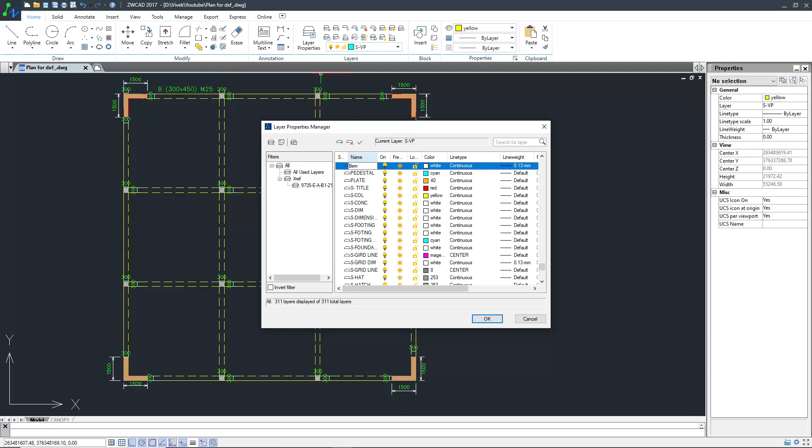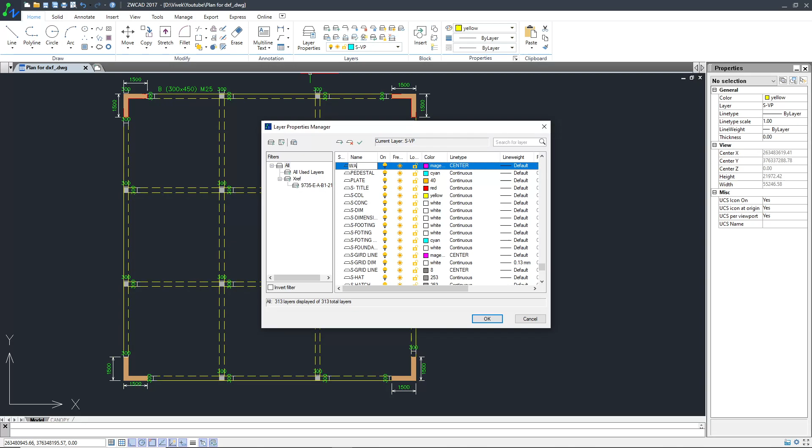First of all, let's make one for beam. We can change color also. Beam, then press OK. Layer properties, then again right click over here, new layer, column, new layer for walls. We can change color like this. OK, press OK.

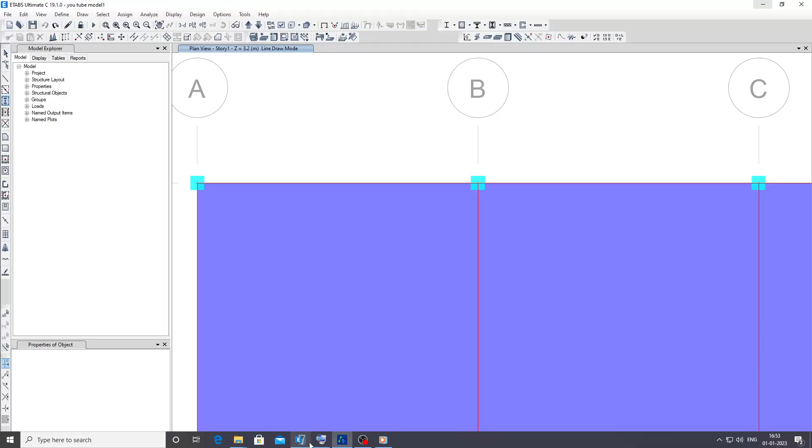Now let's prepare for beams. You just have to take a line and select the layer accordingly, as we have prepared a layer for beams. For beams, we need the central line. As we know in ETABS, the central line is required for beams. The central point for columns is required. But in terms of walls, we need the full length.

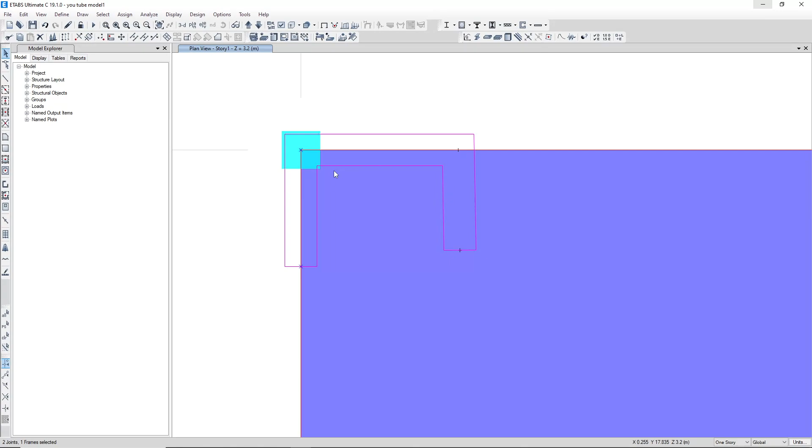If we have to prepare a wall in ETABS, see, we need the full length to draw a line. It means we need a start point and an end point. So in terms of DXF, similarly, we have to prepare in AutoCAD. So we need to take a line, select layer beam for beams. We can select at the central point.

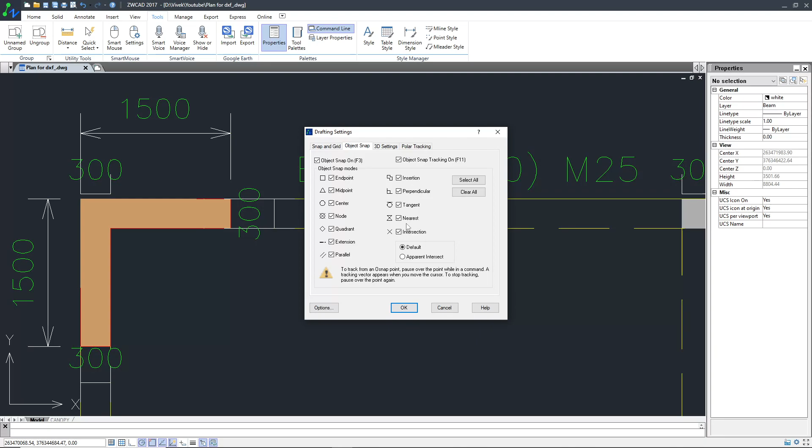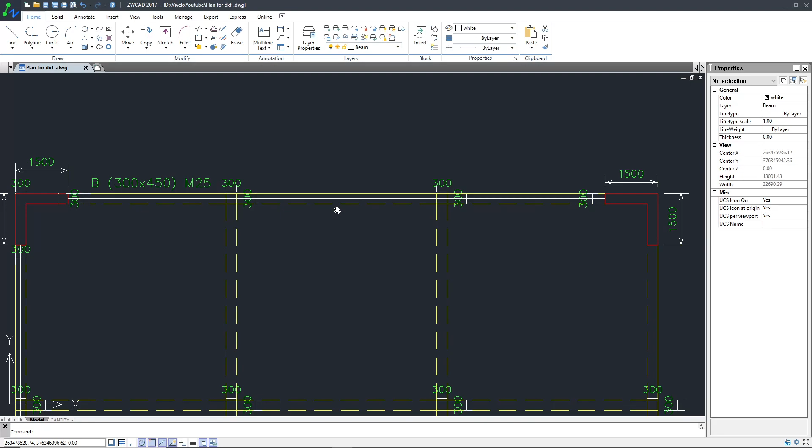Before that, you can turn on Object Snap, select all, OK. Now take a line, central point, beams. Similarly. OK. This is an example for beams. Now similarly, we have to take for columns.

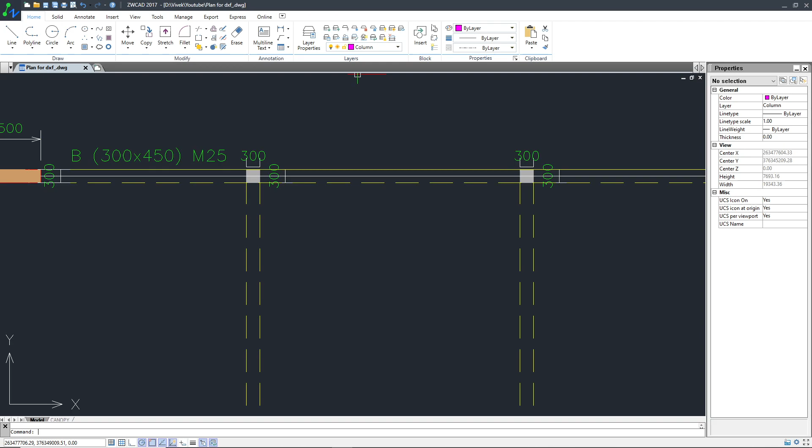For columns, select column layer, by layer for color. This is for color, like the color that we have selected for columns. If we select by layer, then it will come the same. Now, for columns, we need only the central point, so we can draw like this.

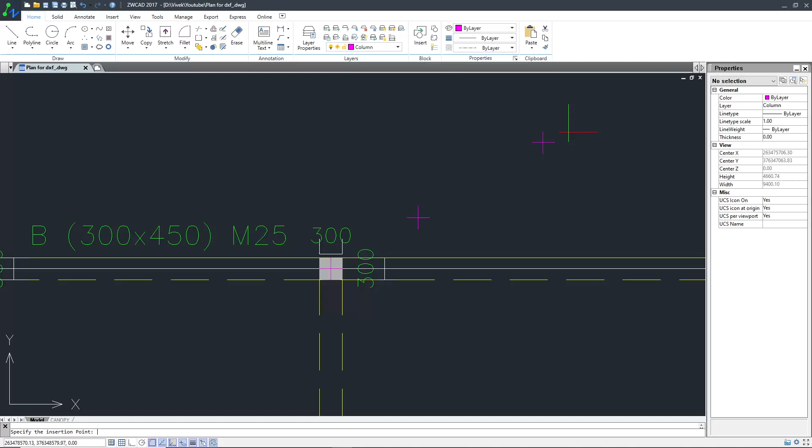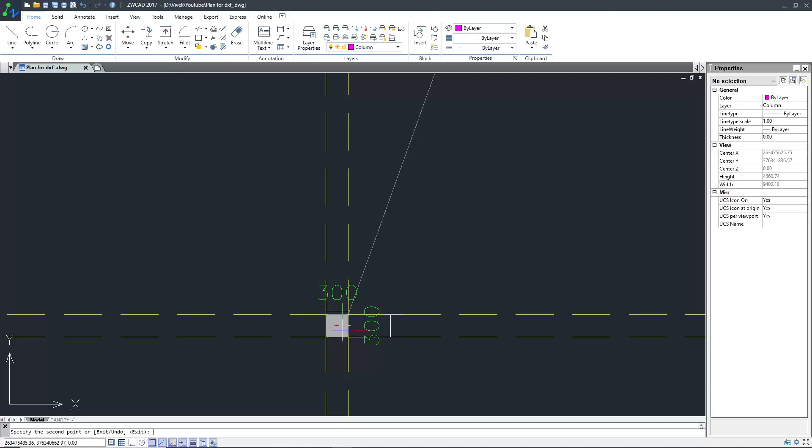For all the similar columns, instead of taking two lines, you can just copy this, take it out, select, right click over here, paste as block. You just need to select this block, press copy, press copy, center point, center point, center point.

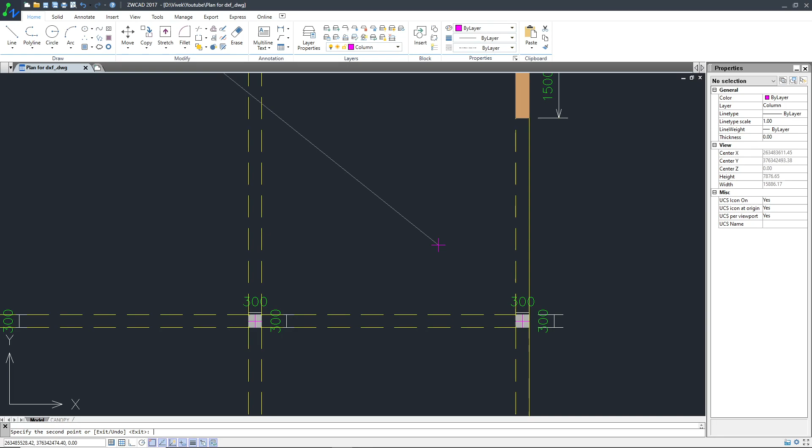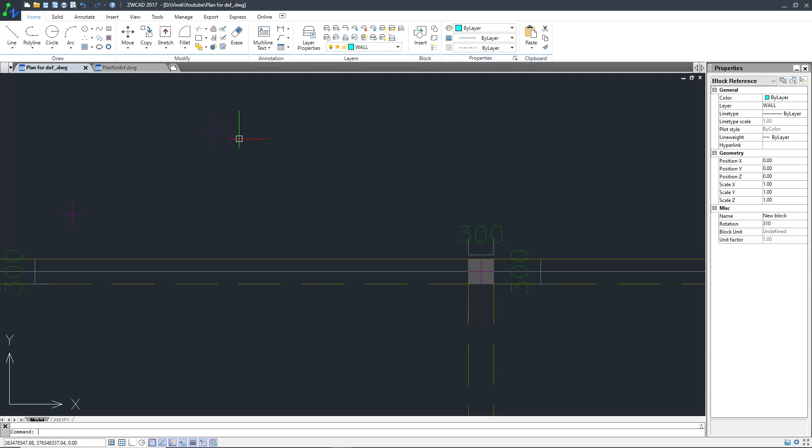Now for columns, we are ready with the points. Now explode these blocks, or you can explode these at the last, but let's explode these right now. For that you have to turn on only the layer that we have used currently. So select these and press X. So this will explode our column layer. Again, LAYUNISO to turn on all the layers.

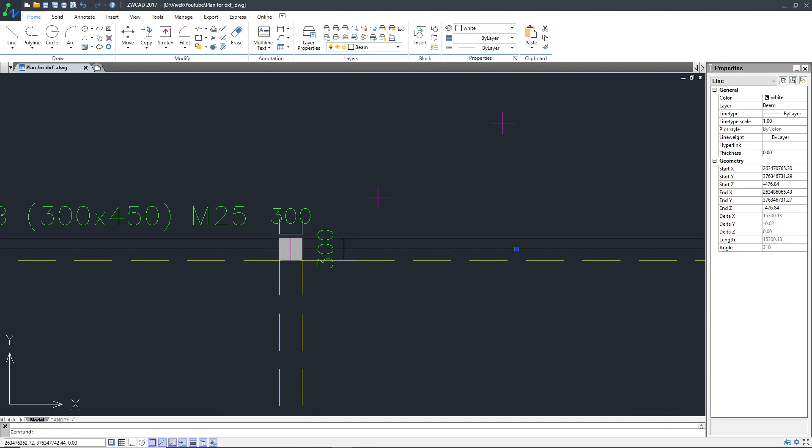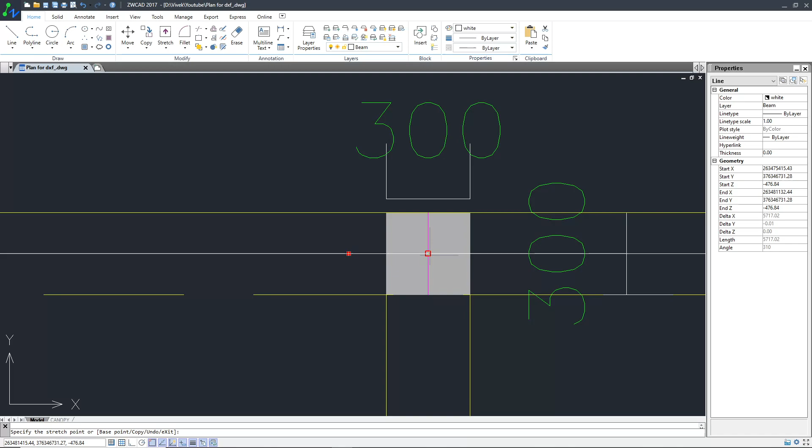Now let's come to beams. Select this line, take a command, break at point. We need to cut this line at this point. One, two, and this three. See, okay. Now we can copy these lines.

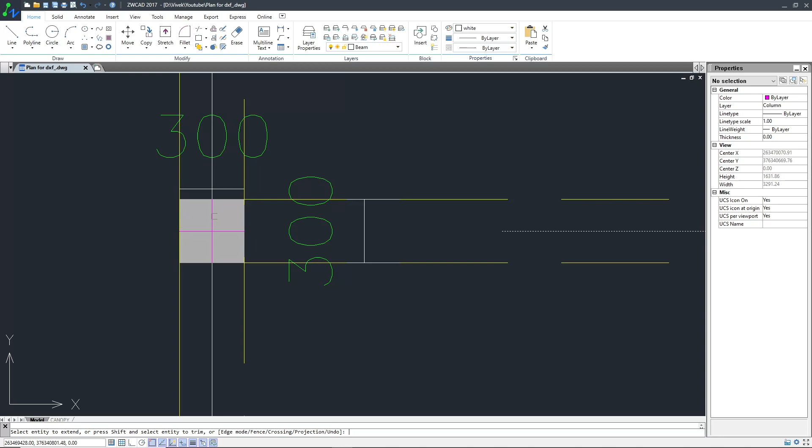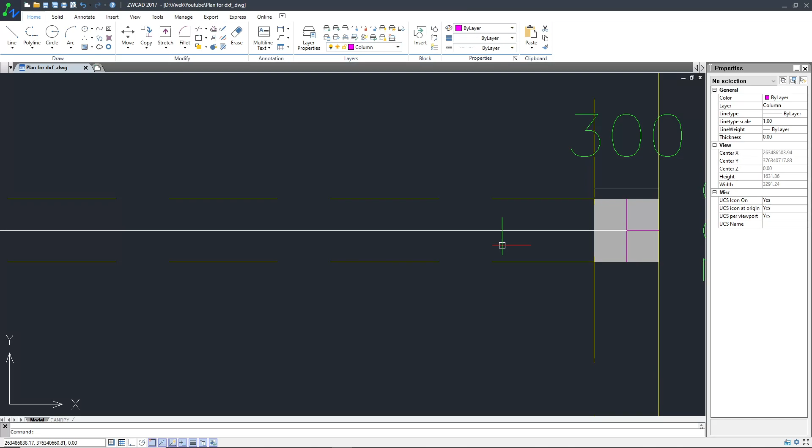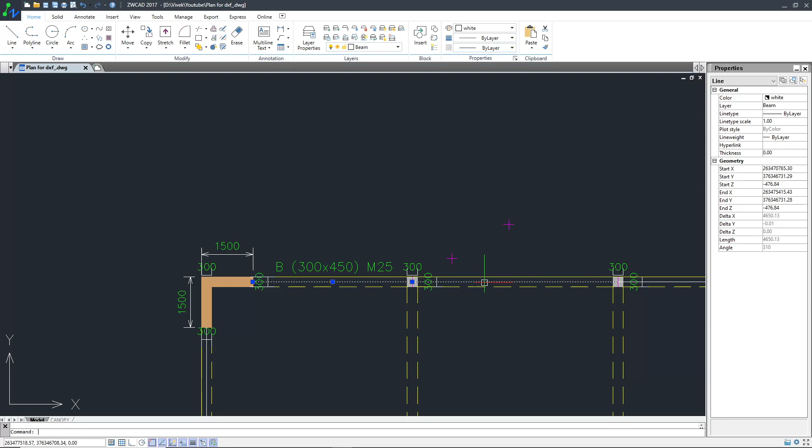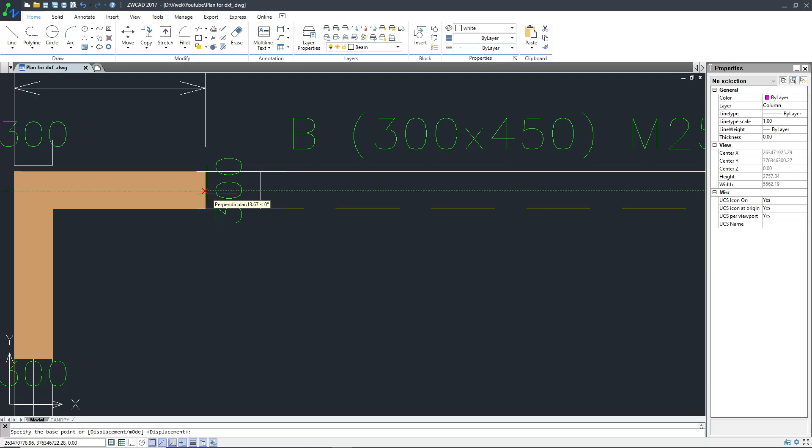Now we can use the extend command at this location. Or simply one thing we can do also, select trim. We have two options for this. Now it is easy to copy because we have a symmetrical system, so we can copy for quicker action. Copy. And here we can copy this one. And here we can copy this one. Okay.

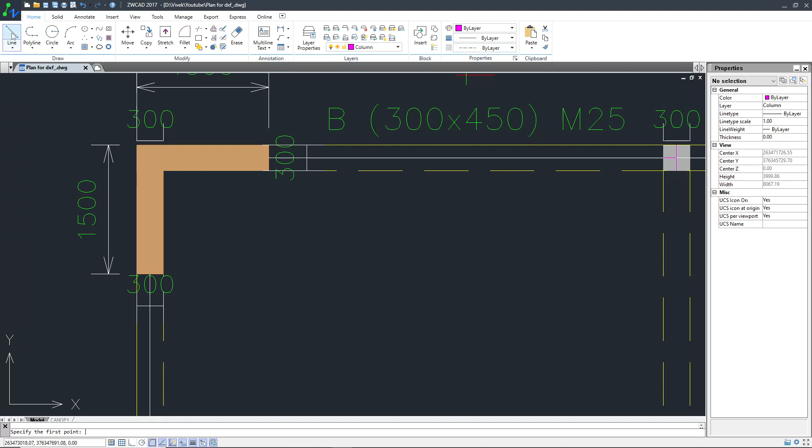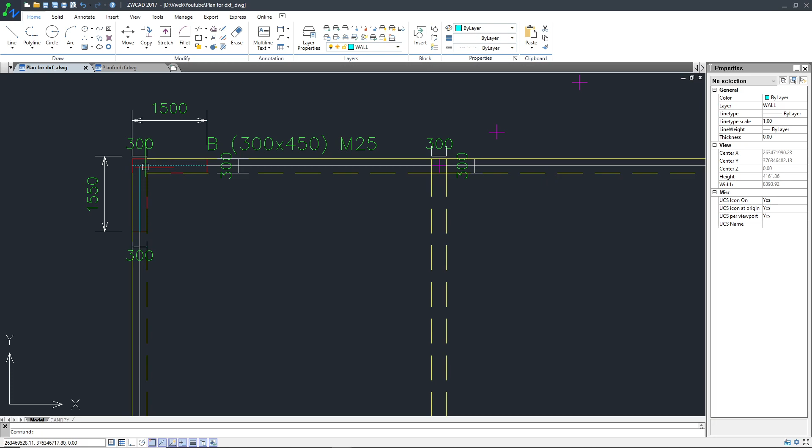Similarly for the vertical one. Now let's go ahead with the walls. Now we are left with walls. For that, choose wall, take a line. Similarly for all the walls you have to draw the points. For walls we need 2 points as we discussed earlier, the first point and the last point. So first, and this one is the second point.

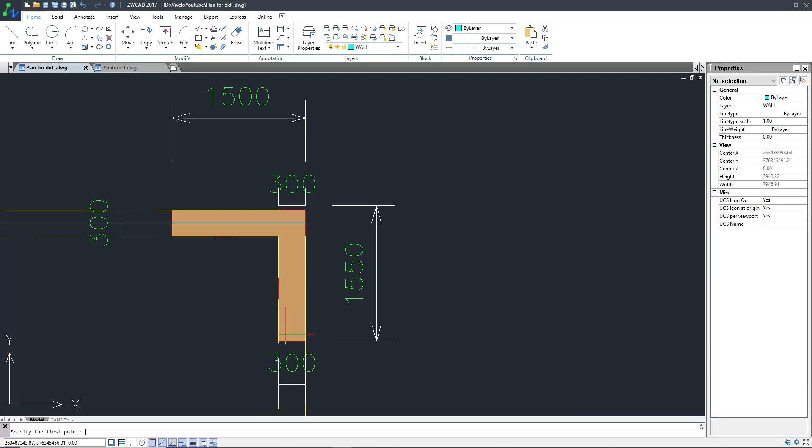Similarly for all the walls that we have. As all these walls are similar, we can copy and paste. We can do that also. So now we are ready with columns, beams, and walls. Similarly, we have to break along this line as we have done horizontally. Let's make this beam line single without using the break command. Beam layer, take a line.

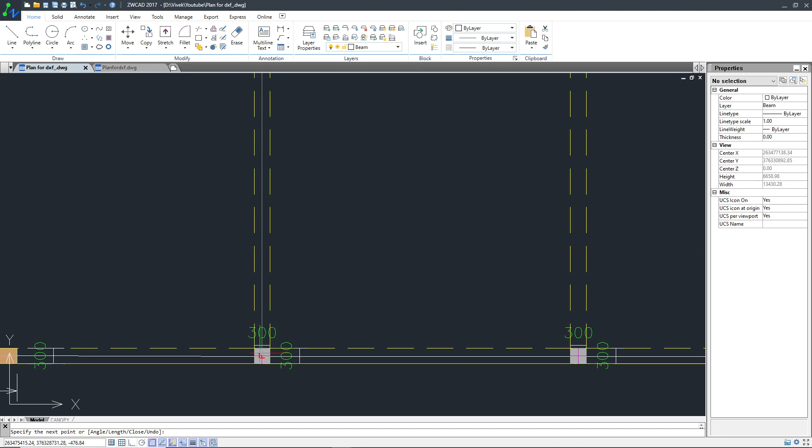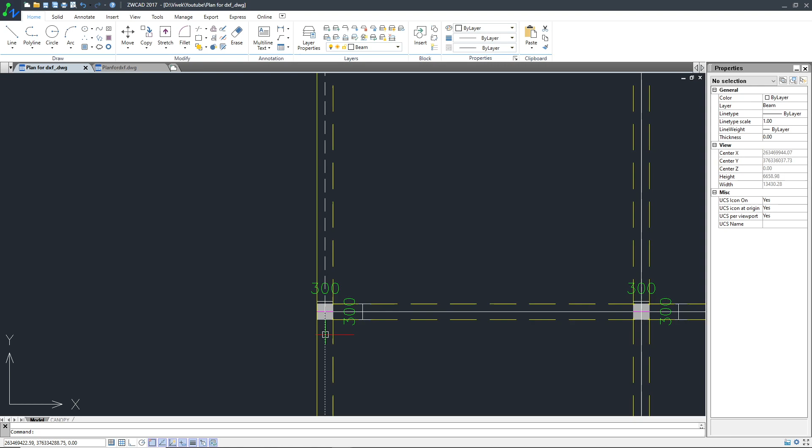Okay, so this is another way. Copy this for the next grid. Similarly, we can copy this one for the last grid. So now we are ready with columns, beams, and walls points.

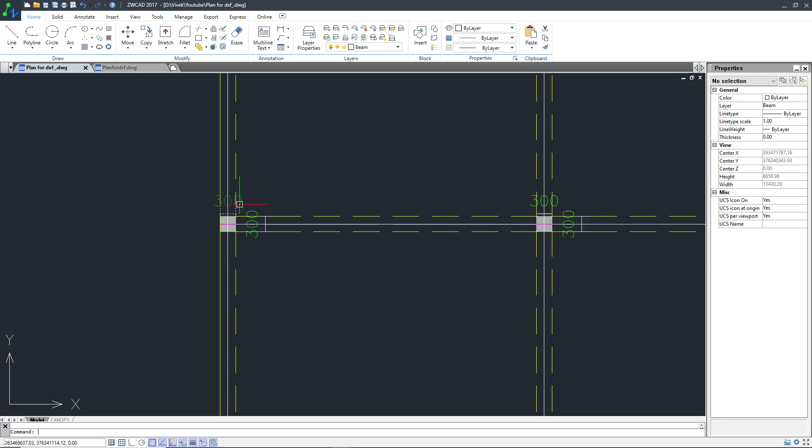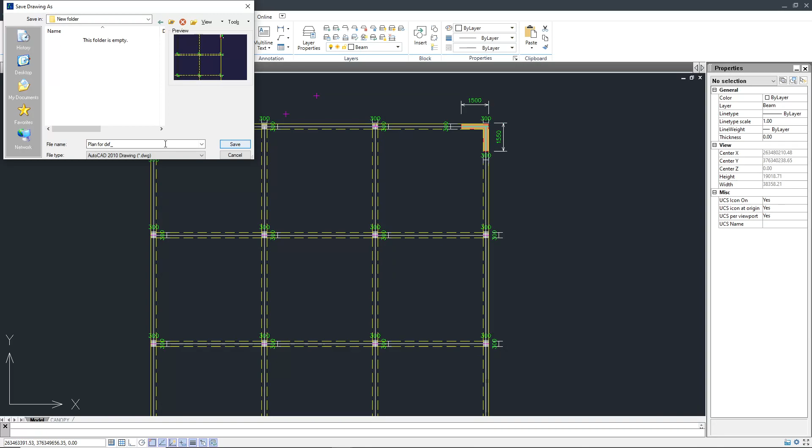As for the DXF, only the points are needed, so these layers are not required. These are the structural layers, these are the dimension lines and all. So you just have to make a copy by save as, make a new folder at this location, save this. Now we can just turn off these layers using the command LAYOFF.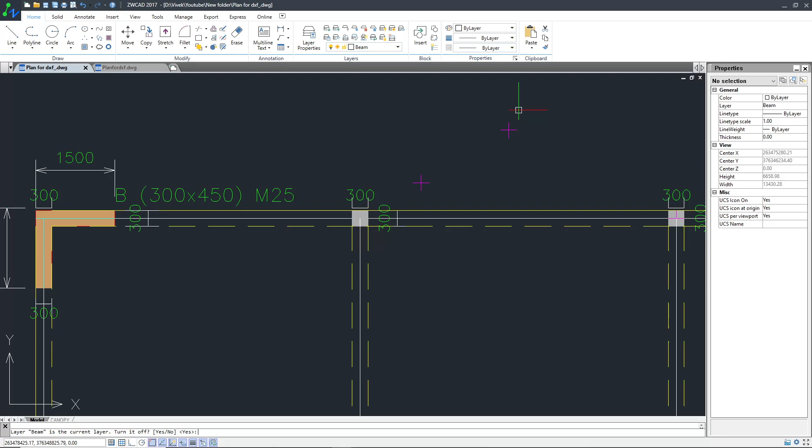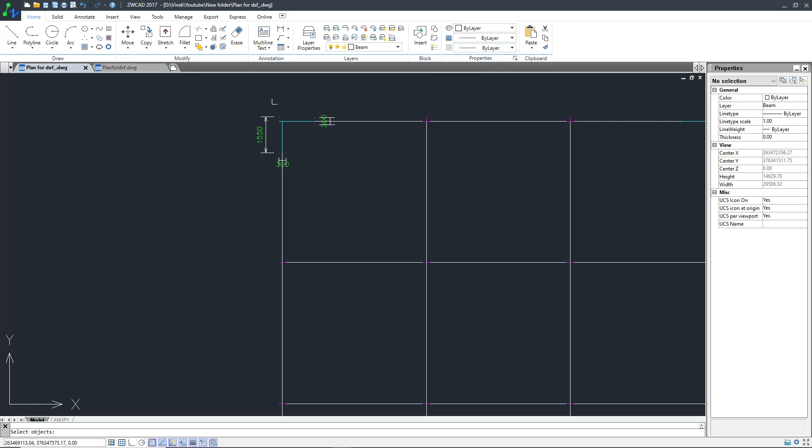Now these things are not required for the DXF right now. So we will select these things and delete. Now again we will use the command LAYON. So these are not required. The things which are not required, we can delete from here. Now at the end we are left with these layers, beam, column and wall, which are required.

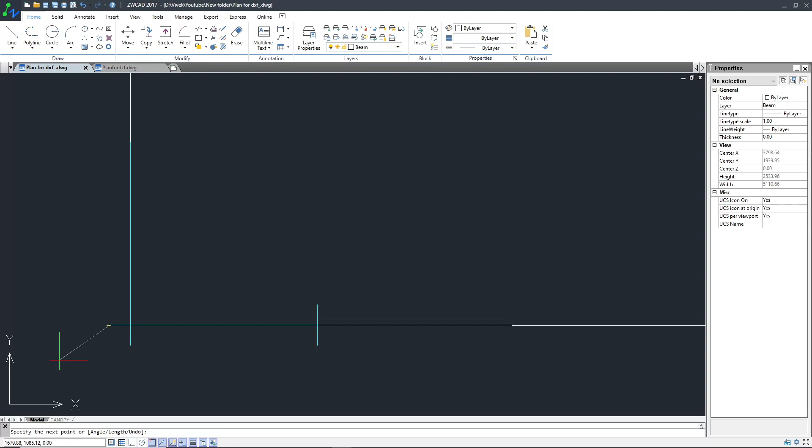Now one more important thing that we have to check is whether this point is at the UCS or not, meaning the 0,0 point, which is required for Etabs. Otherwise it will go here and there when we import in Etabs. For that, take the line command, type 0,0,0 and enter. It will go to the UCS. So we will select this and move it to 0,0.

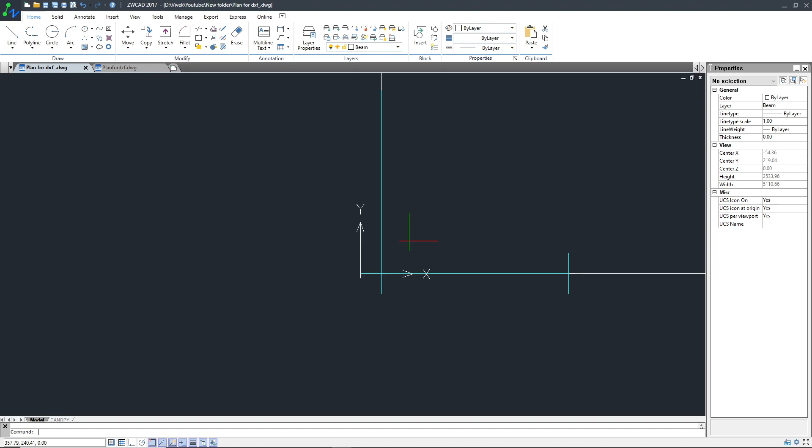Now save this file as DXF. Okay. And in the next video, we will learn how to import this DXF in Etabs.